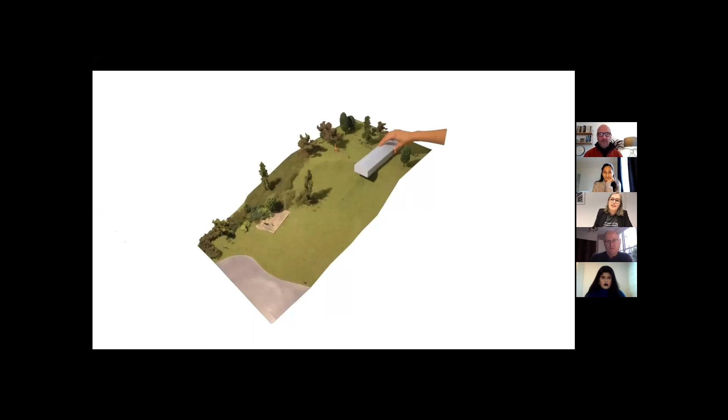An interesting project because it was done by Living Architecture, an initiative by, amongst others, Alain de Botton, to prove to the British that it would not be so bad to live in a contemporary house, by offering these holiday homes made by contemporary architects in a contemporary way. A fascinating experiment—I'm wondering what the follow-up of that has been so far.

You need to inform me about this rather than me telling you about the current situation. In any case, it triggered us because we had quite a large plot on which an old barn, a derelict farm, was demolished, so we could still play with that type—the pitched roof, something that returns in our projects more often. I think it's sort of the house feeling, the idea that there might be an attic.

But also this idea of how close can we push the house to the view, and how far away can we get it from the main street. And this sketchy idea of maybe we can push it across the boundary and make it exposed and unexposed in an unexpected way, which immediately leads to quite an intriguing question about structure.

The whole arrangement of the structure is something very important for the house, and since I'm talking to a lot of architectural students, I imagine this is of vital importance as well. What I think is very interesting about this structure is that it encompasses the shape completely. The volume, the idea, and the structure are really one in this particular project.

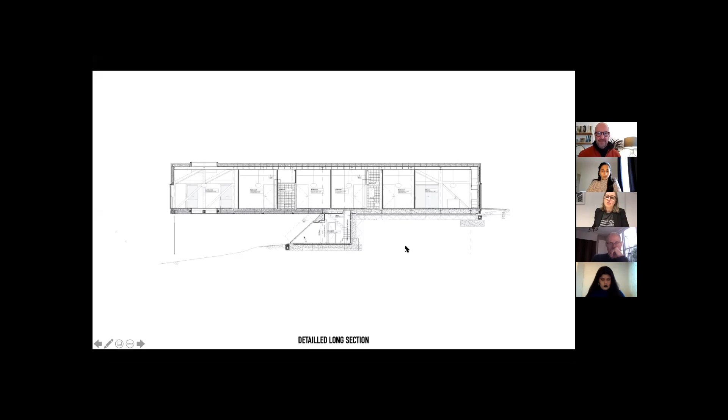In this case, a space underneath the house, a space inside in which you will feel the tension of this house, which is always slightly moving, even if you want to stand at the end near the living room here. It's also shown through a glass floor. And then there's this swing where you can actually hang under this house. So here I'm revealing to you the structural idea.

And then it's covered in wood as well on the outside and the inside. There's a shiny cladding that reoccurs in more of our projects, also as this idea of how, in a way, the building can also reflect and try to dissolve itself. Although it has a big size, it also tries to disappear again.

So it's a highly conceptual project, and it was also supposed to be like a visiting card of what contemporary architects can do, of our ideas. That was definitely also a challenge, and that's how it has been made.

Oh yeah, here you see - until today, this is under construction. The outside is finished, the interior is being constructed right now in Rotterdam.

A depot building, also cladded, in this case in coated glass, in a space in nature where you would maybe even prefer that nothing is built, in a former park. And also this building, that had to be quite big as well, tries to at the same time disappear and create space at the roof. In this case, a new little park on the roof has been established in a building that's predominantly closed because it's a depot.

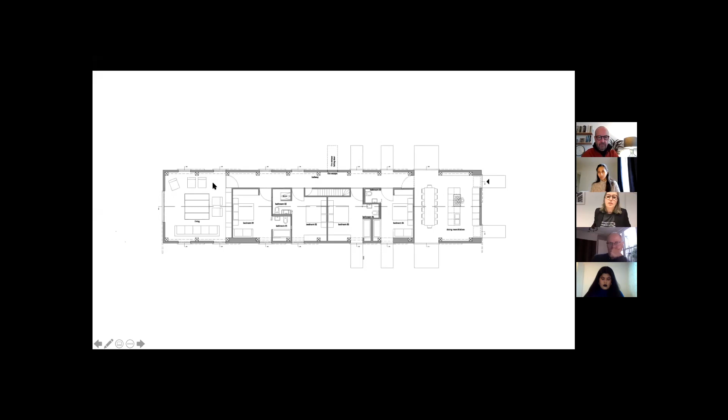The interiors have been made by Studio Makkink & Bey, with all kinds of nice panels based on Dutch landscape paintings. Lots of Dutch design furniture was also included. The wood also gives a certain intimacy again to the whole situation. There's furniture from Makkink & Bey as well, and this extends into the living room.

You see the glass floor - you can make a choice whether you want to be looking at it or cover it, because there's these puzzle tiles. If you think it's too scary, you can detach yourself from it as well. Inevitably a fireplace, of course.

And then there's also this idea that you beam into the nature with this, and it's all surrounding you through roof lights and all these windows, but also at the bottom of the house.

So privacy maybe is an important topic to talk about as well, and in private houses this is even more interesting to deal with. It's interesting in apartments, but also in villas, because you usually go to quite extremes. On one hand there's the interaction between family members, but then the other thing is the relationship with the street and the exterior. Here in a villa project not far from Rotterdam.

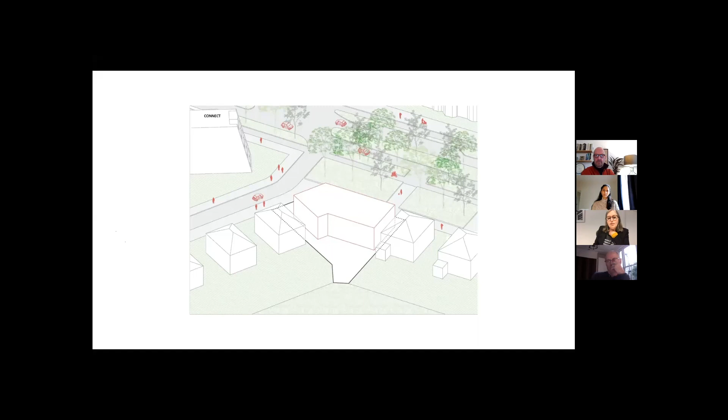And what we did with them was that we sort of carved out a new outdoor space inside, where an olive tree was put because of the Greek roots of one of the family members.

And then you suddenly had this sort of introvert space possible, where actually the whole house could be opened up without losing too much privacy. On the other side, it deliberately closes off itself, and it has this mosaic window where outdoor and indoor are filtered, and you sort of slip in through this front door porch here.

Part of the houses in the area are actually in a white modernist style. That was another thing that was allowed in this neighborhood, because there are some 20s modernist houses built here as well. So, you could say, an obliged choice of style even for us. The bricks are glazed and white.

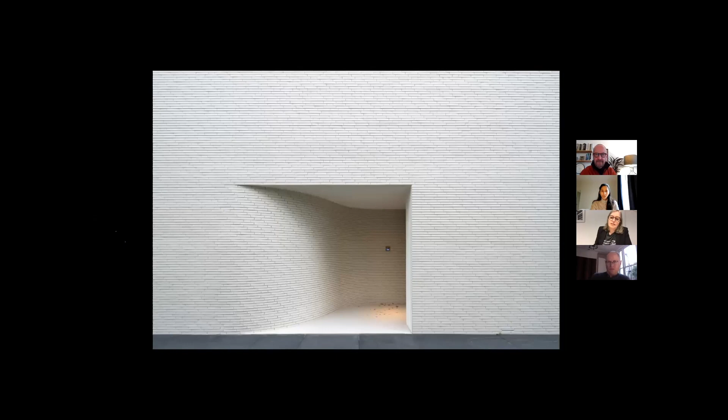Again, the Greek past, the Greek history and the Dutch somehow intermingled here. Modernism and the White House. So here you see it from some other places.

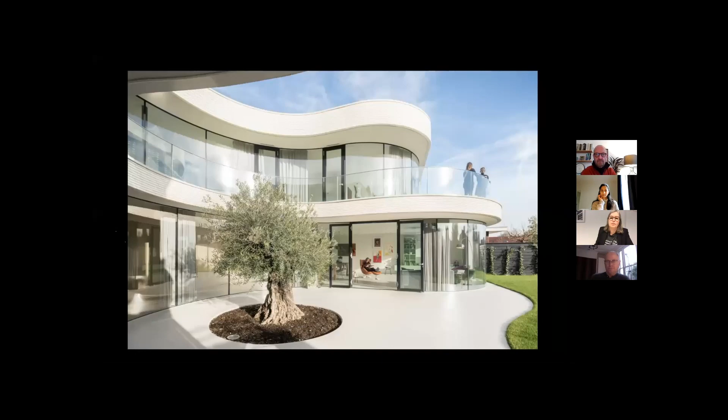It's also this sort of free-flowing floor plan, where rooms are connected to each other and organized actually through this outdoor space. The indoor is organized as well. On the top floor, the bedrooms and bathrooms of the family. And here again, floor to ceiling doors and windows, so that on one part the house can be completely opened, and every room has this relationship with outside.

So you could say that's a deluxe version of this idea. Not so long ago, some friends of us also asked us to help them, and they bought a plot with an old office building.

In this case, we deliberately closed off parts of that other house, where we're confronted with 3 sides of the building already being completely closed. So this is the original floor plan. Only the front side towards a little street had openings. The 3 other sides are blind walls, and there's some roof lights.

It was a derelict building from the 80s with some additions, in bad state. But the owners thought it would be good to try to reuse this. And for us, this is also a good challenge: not just to throw away everything and demolish it, but to try to actively reuse as much as possible of the existing building.

We're entering new times, of course, when it's really very vital that we start to think in this particular way. So, some parts of the structure. It was also quite complicated, because what kind of possibilities do you have if you have such a deep building with such a little amount of windows, living really inside the neighborhoods as well.

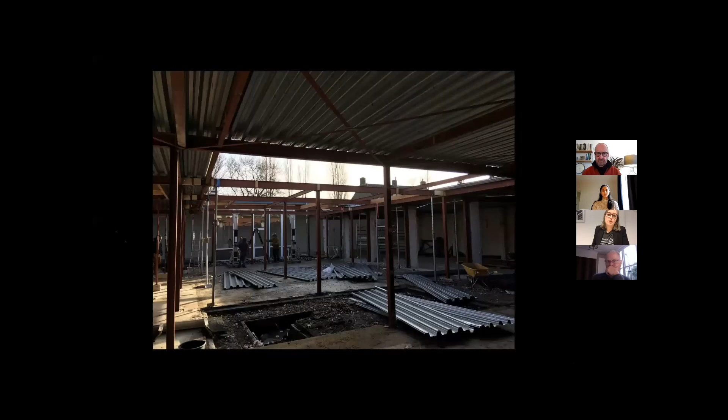So here you see what we did: there were some tiny openings as well inside. We completely opened that up and turned it into one big new patio, and aligned all the rooms around this new patio. There's also a practice in the house of one of the family members who works from home, so that was also incorporated in the floor plan.

So we used the original heights. We used a large part of the original steel structure. It was reinforced, the roof was renewed, and openings were largely kept. This is the new floor plan that we made, where you actually enter and can see straight through this patio right away.

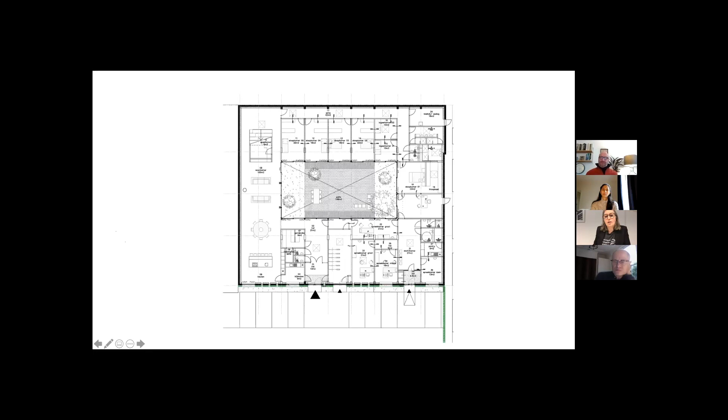And then the higher part, the original higher part, we created the living room. And then there's a sort of sequence of rooms. You can actually make a round, walk through the house if you cross through the practice space. And well, it's wonderful to see how you get this amazing relationship with the patio.

I think that's something which will come back as well. It's not enough used, I think, but under denser circumstances, probably one of the best ways to create indoor-outdoor feelings. Again, our trademark: big windows and openings, and in this case, with a lot of wood being used.

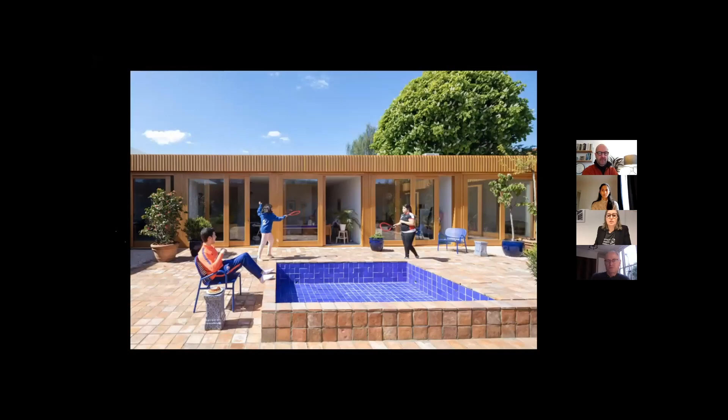And so the original walls and window openings are all covered again, and mostly use of color creates an atmosphere in the house. Again, with Mediterranean backgrounds, colors were picked together well, under the guidance even of the inhabitants, what they preferred very much. So you see this now.

Last summer, very nice space to be in, also in the quarantine situation, of course. And part of the old floors are still in that patio, so we kept a couple of areas where you can really put full-grown trees, and others are more covered and used in different ways.

So here you see that, and a lot of the materials here are actually recycled materials that have been used also in this patio.

When I think of Britain, I also think of the suburban house and the row house. I think that's something we have very much in common between the Netherlands and Britain. But it's also something I sometimes get a bit sad about, seeing that there's maybe not enough development in this way—it's still largely connected to cars.

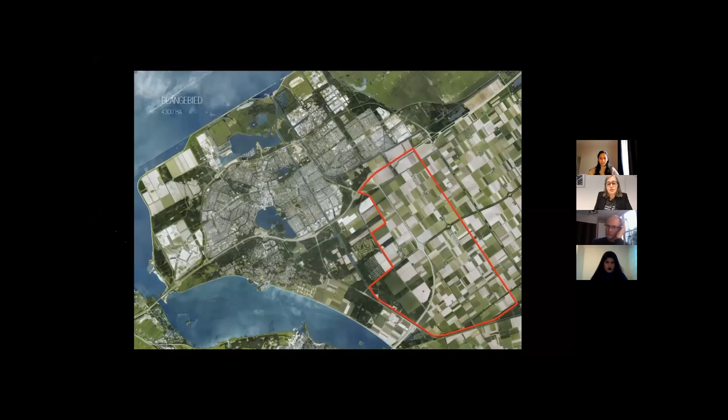And to its extreme, I would say—I have to speed up a bit as well, sorry. The other end of the spectrum was at some point this division: house, car, garden. There's a lot of abandoned agricultural land in the Netherlands because of intensification and other ways of organizing area. Near a new town, not far from Amsterdam, the idea came up to create even more freedom for the individual homeowner.

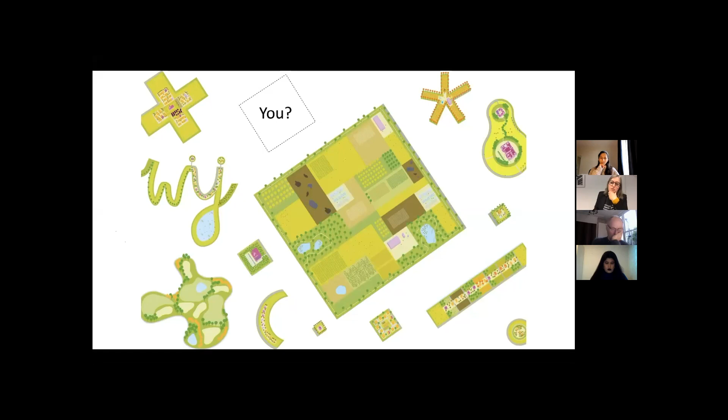Instead of planning everything precisely with all the statistics applied to the previous schemes I showed you, the idea was to give maximum freedom—a plan called Freeland, with the idea that you could achieve more freedom if you work as a collective, making decisions together on land use, but not necessarily exactly as planned by a government organization or a housing association.

By also thinking about sharing facilities with each other, but more on an individual basis. The calculations showed that together you could create more freedom, but also more space while using it more effectively.

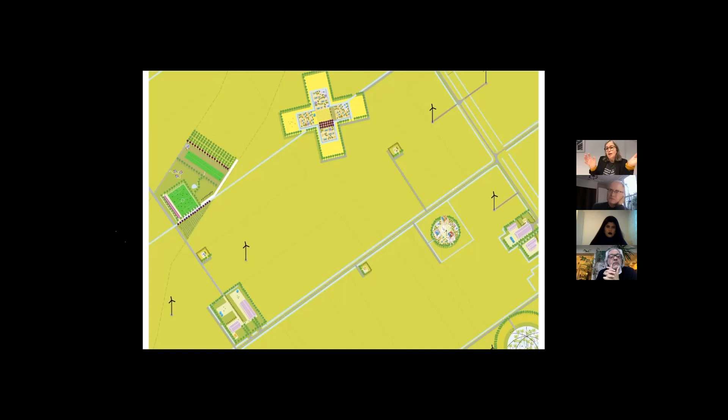The givens in this area are that some main roads are made, but individual roads you can build yourself or share them, or build them all by yourself. The money you have, you can distribute as you like—spend it all on the road, or build bigger houses, or want bigger plots.

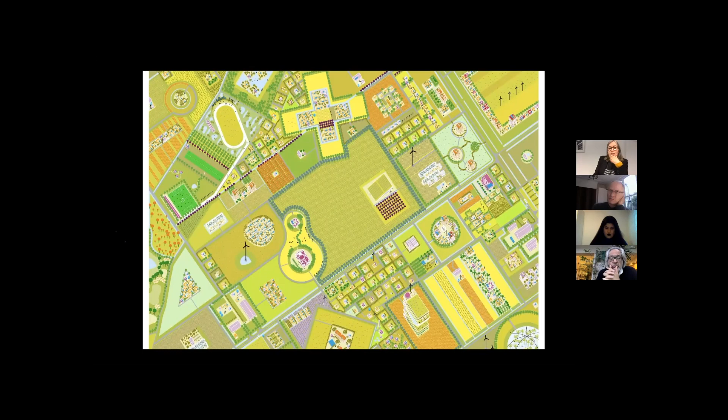You were not obliged to use all the infrastructure that is normally automatically put in place. You can do it together with friends or with like-minded individuals, and there is no forced grid on you beforehand. Individuals and collectives took up this challenge—some people developed prototypes and tried to find users for it. If you go there now, you can see all the different houses and experiments people have made.

Maybe under other circumstances in other countries it's not so revolutionary at all, but for the Dutch, it was, I can assure you. People experimented with building bigger houses with light constructions, and of course experiments with all kinds of contemporary materials and recycling were made.

People started to realize their dreams around their plots, intervening with the transport systems and how traffic is organized. Some used the opportunity to create their own grey water cleaning zones—this is a long house where several families live together, and this is where they clean their water. So they were off the grid partially, etc. All these dreams could be realized in this neighborhood. Long talks about politics and ground price are also possible, but that's maybe for another lecture.

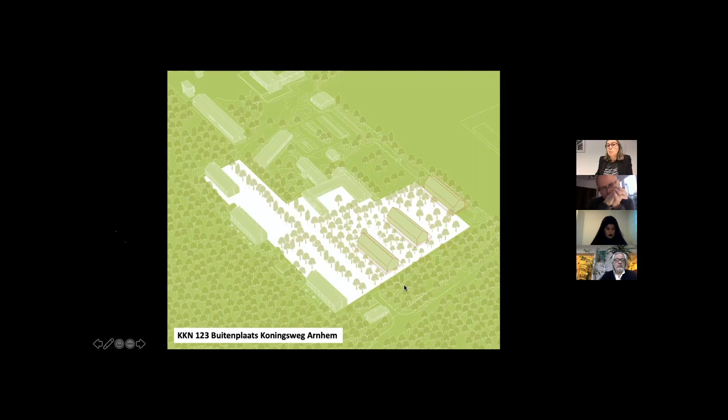Including this one—I'm talking about three rows up front. It's a tiny project; again we would normally maybe not have been asked for it, but we thought, if it's a tiny project, we might actually be able to experiment again, because we haven't been able to experiment with row houses in a long time.

Like I said, the shape was given. They were to be grayish, which was part of our own master plan and remembering of the army past. We thought, let's try, because there are so few experiments yet, to see if we can make it very circular, reuse a lot of material, make it demountable, etc.—all kinds of aspects of circular building. Let's try to experiment here, and probably people could be interested in living in such a house as well. So we went onto the market.

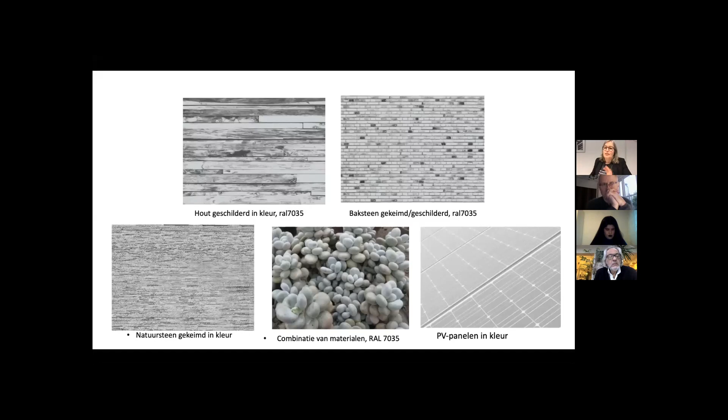That was the previous image, to see what kind of materials are available—depending, of course, on second-hand material markets. We thought if we give them all a tone, a color, then we can also create this unity that is also needed. Well, it's still under development.

I'm not completely happy yet with this image, of course. But the end of the story was that we would end up with a lot of material, like an assemblage of materials. And I started to think of a wonderful little building, A House for a Driver by Gerrit Rietveld, that is also an assembly of different materials.

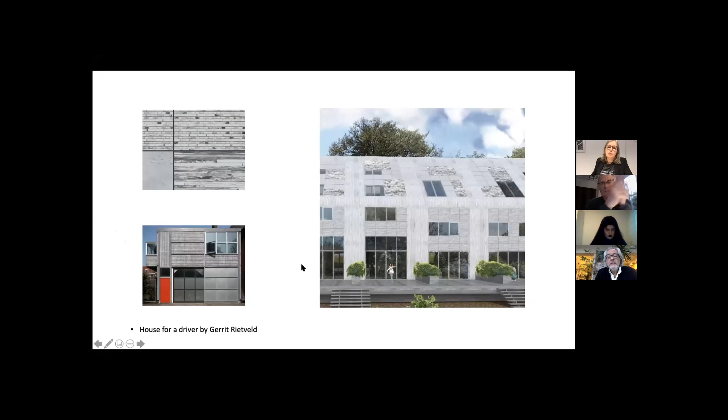Got inspired by that to see if in this wilder way we could collect all this collage of, I don't know yet what kind of materials we will use, and whether people want more or less solar panels or green patches on their roofs. And while we're at it, let's differentiate. Also, the car parks are supposed to be underground because it's actually in the middle of a very beautiful area, so the client asked to put the cars underground, and there you see.

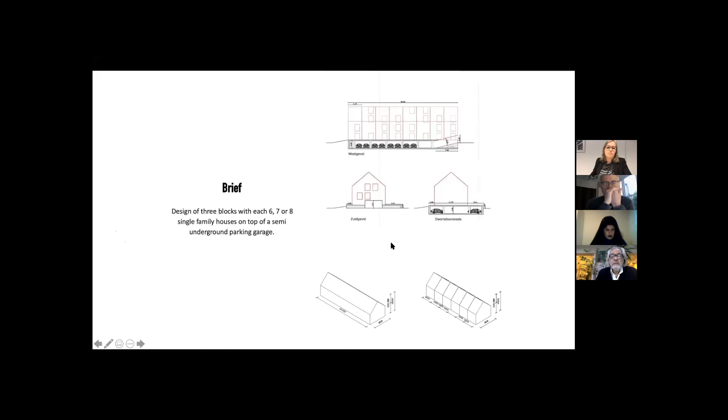But should they all be the same? No. Maybe we can also change the sections, the floor plans, what people can do with their house. Maybe they can choose from different types of houses. So it's kind of this.

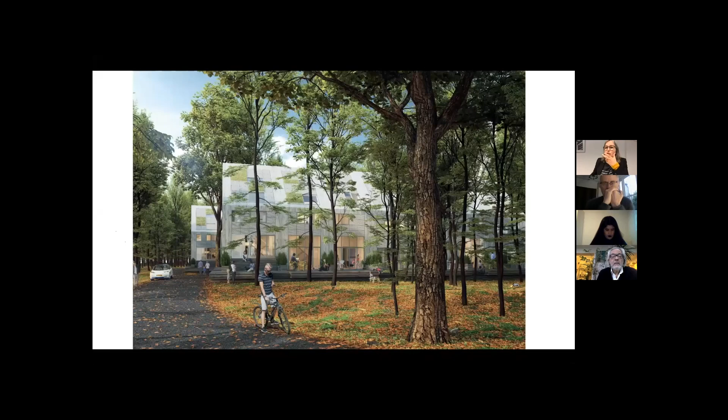We made many different variants of sections that people can buy into that might accommodate their favorite way of living. I won't bother you too much with it. It's still under development, not the final shape yet, maybe also not expressive enough yet. But I'll keep you posted.

The biggest experiment is even to make it work so far, because it falls outside of all kinds of guarantees that normally have to be given for these types of houses. Otherwise people don't get mortgages, etc. So it's an adventure for us.

Ongoing. And in the past, of course, we've also been trying to see how we can make a super dense suburban quality, at the time when people still thought it would be good that people in an inner city have two cars. So based on a grid of 18 houses and actually 32 cars, this plan was made in Leiden, where we created a section to densify—how dense can you build such a neighborhood?

I'm thinking nowadays it would be good—here it was in the inner city and the cars had to move inside—but why not try to do this now in our suburbs? Because why are these cars still on the streets in our suburbs? That's why I'm still showing the project up to date, although it's already a bit older.

Again, with individuals doing even their own architecture inside. They build collectively in blocks, but they can also invite their own architects. There's no coordination except among the people themselves who are building together. They have to fill the envelopes and are built back to back, so they have rooftop terraces, patios, and they can do something at the front of their house.

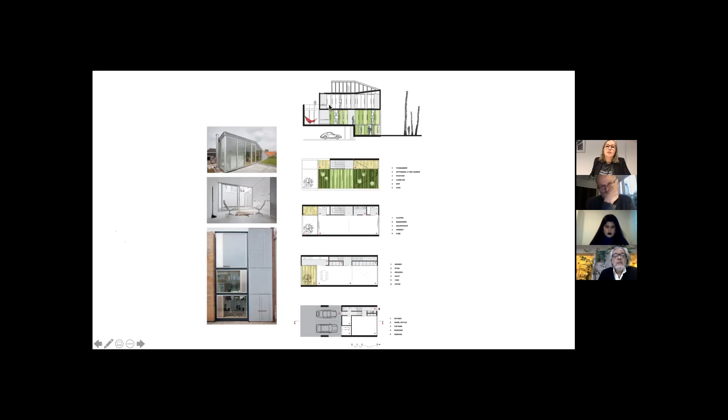Obliging people to always make an open space towards this street, these car-free streets, because the cars are underneath. And here you see also how these roofs and these different balconies develop in this place.

And if you go there now, 15 years later, indeed all these streets have different characters because the inhabitants were also able to choose their own plantings. They had to do that with the other block again. There's children playing everywhere—it's become very green, like a real oasis, and there's a lot of people hanging out on the streets.

We also left out one block that's important as well. This is the missing block, where I found, on a sunny day, kids hanging out in the little park.

I don't know if I can go back to the master plan, but also what was important for us is that we created all kinds of different zones in this area—little playgrounds where small kids can play, the streets without cars, and these are the streets with cars. This is a bicycle highway.

Larger areas around the water where taller kids could play. This is the missing block with the park, the mini park I just showed you. So this whole differentiation of spaces is important—the street, different playgrounds, all kinds of organization inside.

Bicycles can also be parked under the houses. Still relevant, I think, until today.

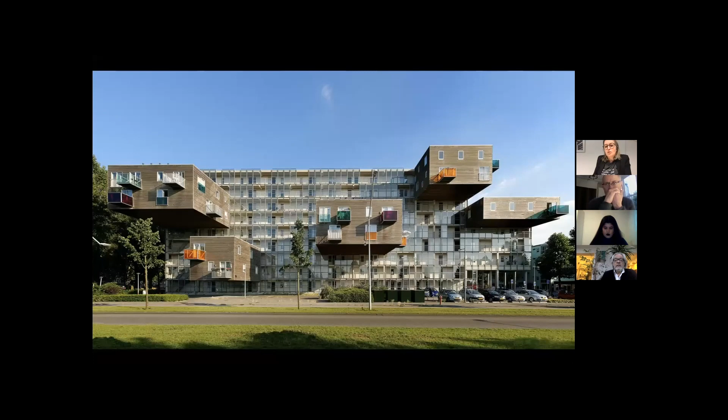And a third typology, I will show you four—the apartment building, of course. One of the original first buildings of our office was the block that fit all the houses for elderly, spectacular on this side, where some of the houses are actually extended.

The sound regulations for sound between apartments are so heavy that we discovered the structure could actually carry the cantilevering houses.

We didn't have to add much more than these steel columns here, and the rest is all pulled backwards to floors and walls. This is a well-known part of this house, but maybe lesser known is that we also deliberately created these balconies in a messy way, so that people somehow started to interact with each other. That was our idea.

And we also had the colors. There's a lot of same houses, but every house has its own little balcony with its own material, in a different connection with neighborhoods, to create this little element of your own identity in the sea of houses, which was very important for us.

We even went through the complication of photographing every house empty and entering again when people were living in the houses, to see what had happened. I'm sorry about the extremely low resolution, but it's published here and there, to see what happens if you do these things with a house, the different window openings and the different colors.

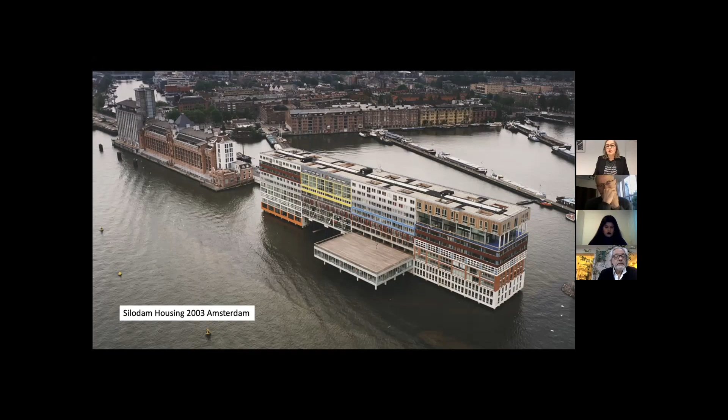For example, collections of different typologies, creating suddenly a platform shift going out of the building. How far can we go in structure to make lots of different types of apartments, as you can see here, without losing too much money, so that not only vertically but also horizontally all kinds of differences could be made.

The relationship with inside and outside, and how it can differ if you make galleries, balconies, patios, double height spaces, voids - different types of structures inside a building.

This is actually also a constant way of trying to make things happier, to have streets inside buildings, to create diversity, and through diversity, a more diverse community inside buildings as well.

People who like to live close to the water, people who want to live up, people who live on one side but can go to this big balcony and see the other side as well, where joint events take place, as well as on the other balcony.

And expressing that also through facades, through materials, through references even to other architects and styles and days.

And then in the end, of course, you see the sort of densification of the Netherlands also coming back in our work, where we even start to create hybrids like the Market Hall, where the apartments themselves start to form a space that would otherwise maybe not have been made.

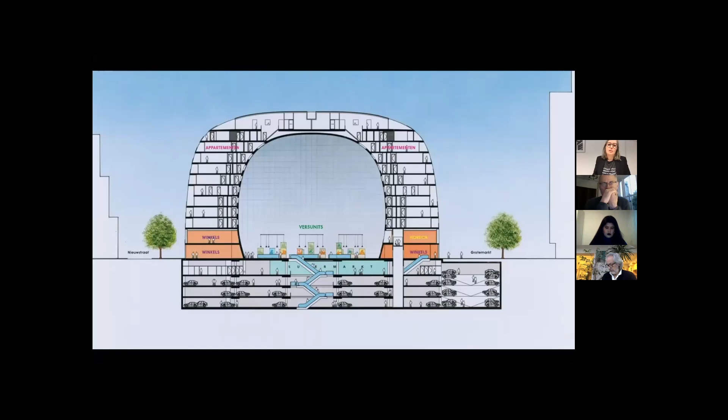And a sort of technical challenge how to get to these apartments, to see if they can get connections to the outside, but also to the inside of the market - sort of mid-range apartments, couldn't get too expensive.

The top ones are more expensive than the lower ones, but still halfway decent. You see the kind of regularity used to create this shape.

I'm talking about it now from this perspective, but you see also here how in the inner city of Rotterdam things started to mix and mingle under the higher pressure, which is also nice because they're just building towers. But suddenly there's this other type of building with its unique identity as well for the people living there.

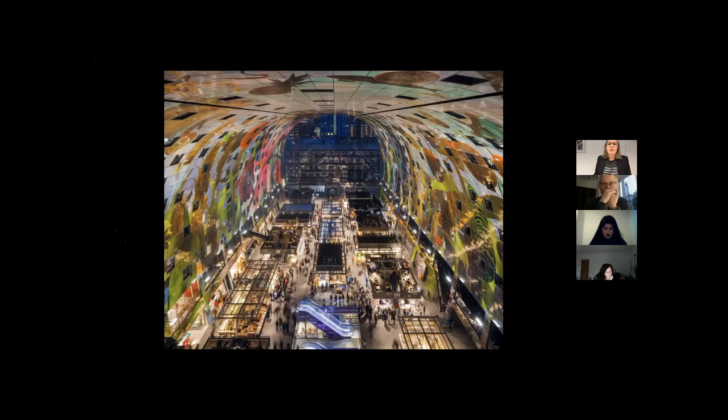This is actually going down into the lower parts of the building, and the archaeological findings exposed along the supermarket and the parking garage, and then high up, the windows of people who can look into the market hall.

Again, a variation of patios, balconies, all kinds of interactions between inside and outside here possible, which then becomes more complicated if we start to work with towers, and the constraints become stricter and stricter.

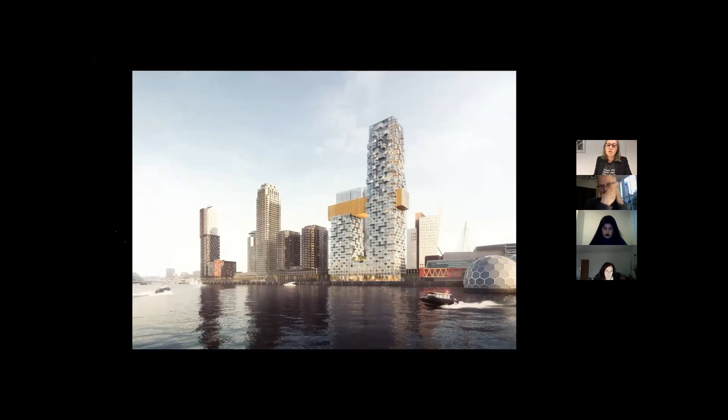In this case, in this competition design for a tall building, which houses apartments, a hotel, all kinds of offices, restaurants, facilities - the Golden Bridge is a hotel, actually.

In a way, what happened in the Silodam, you can see how the shape of this building creates terraces and roof terraces as well, that can be used in different ways, but also the outdoor space itself becomes a theme.

It becomes a bay window, a terrace. You can see maybe other people. It can have different expressions, which makes your inside also different in this building.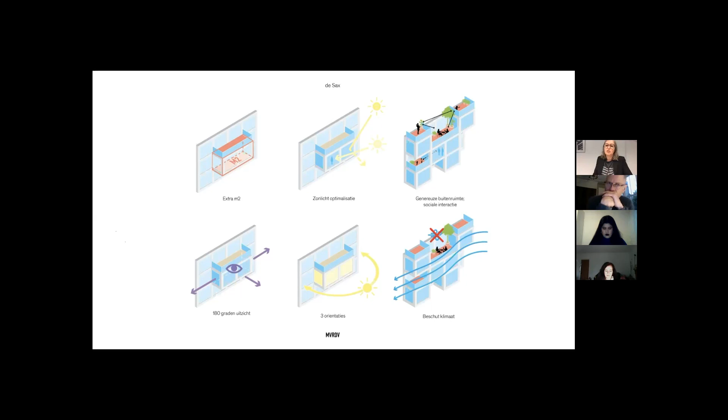So not a monotonous repetition, but diversity and choices that can be made, and it also can impact floor plans, offer much more choices and varieties to inhabitants, and attract different kinds of people.

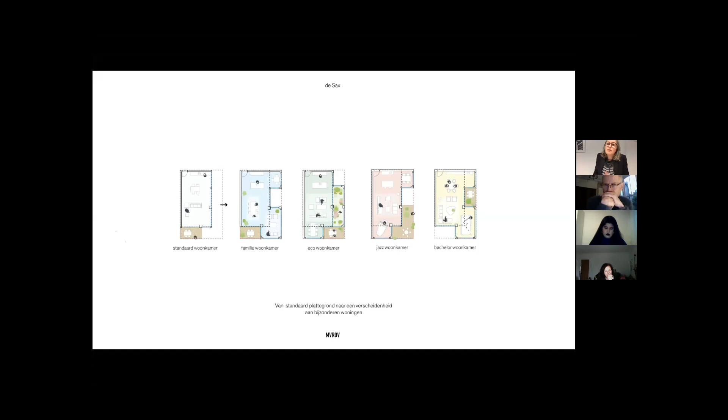Therefore, what we know works so well in the Silodam, that it has a truly very diverse population inside as well, and even at some points these towers meet, and you have collective roof terraces as well.

And there's bicycle parkings hidden in the core of the building. Like I said, there's interaction with stuff on below.

Entrances can be much more bright and should activate, of course, also this area in Rotterdam at the waterfront where lots of high rises are built. So how can you make buildings that are not just fun to be in upstairs, but also are outward oriented at the lower levels where people are on the streets?

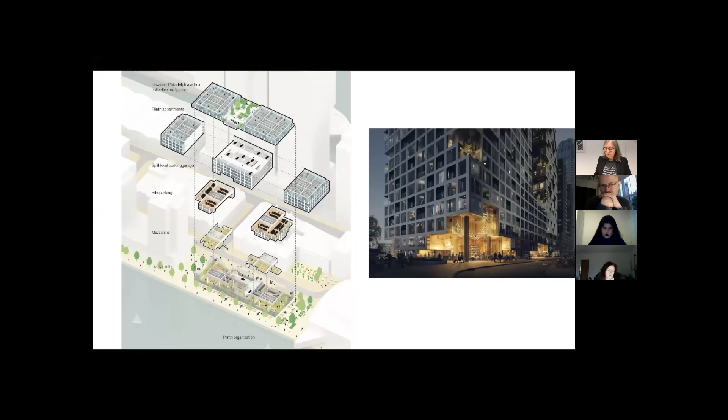Towers—more and more we are building towers. Sometimes because of certain constraints, it's interesting to see that with this outside zone, you can vary the apartment itself and the identity of that space, with extra layers, roofs and platforms that you can create, adding extra attraction for the people living there.

Moving on—this is a Masterplan project where we are transforming old offices. Some are demolished, some are reused; sometimes we use parts of the building, sometimes just the car parks. This is in Amsterdam, inside the ring, on the edge of an allotment garden area and an older neighborhood.

We were able to use this interesting footprint and transform it to create diversity, because what we're getting to now is something more complicated. Where in the Silodam project we could still make a huge array of different types, sizes and financial categories, we're now narrowing down. The programs are getting trimmed down—mostly a certain type of 1-2-3 bedroom apartment, mostly 2, not more, somewhere between 50 and 90 square meters, but also not more. So less and less variety.

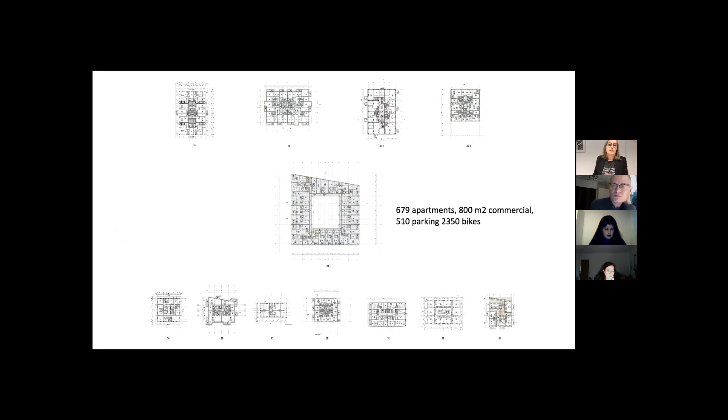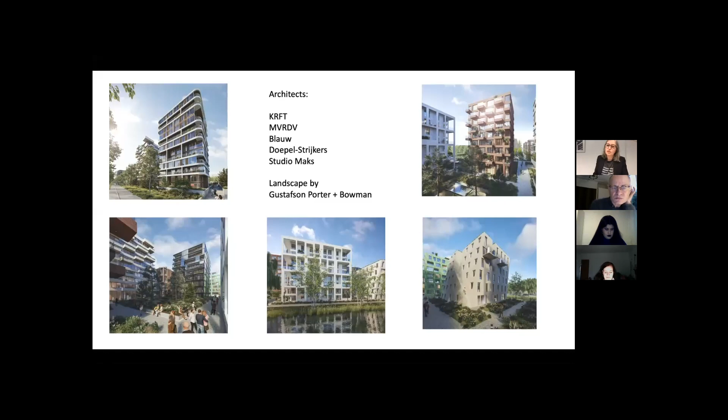On scale, the different plans—same scale, but all the different buildings we are making here—and you can sort of guess the different floor plans connected to it. You also see how they have different interactions with each other. Sometimes they form a mini campus, others are like blocks, with car parks underneath.

You also see the differentiation in balconies and outdoor spaces. I think it's super important that we have this opportunity, when we live in an apartment, to go outside.

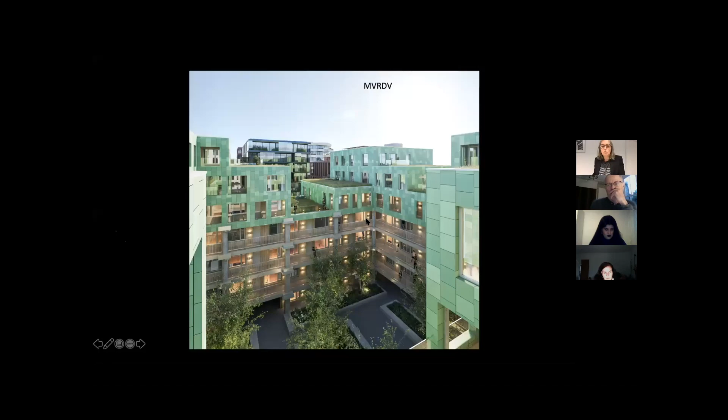This is an attempt where we put a wooden structure on top of an old office building, and hollowed it out. This is under construction currently—these are renders, but these buildings are under construction. Here you see again this idea, also in the Sax project, of an extrusion of the facade and different relationships between inside and outside.

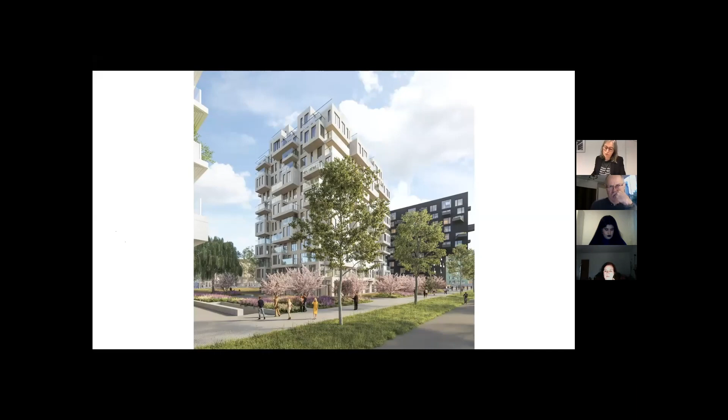I think the next level for us would be to create high-rises that are much more neutral in their use, where it can be altered and changed whether it's an office or a house. It's been done, but it means different floor-to-ceiling heights, and thinking differently about the technical aspects of buildings. That's one of my next ambitions, to see how we could do that.

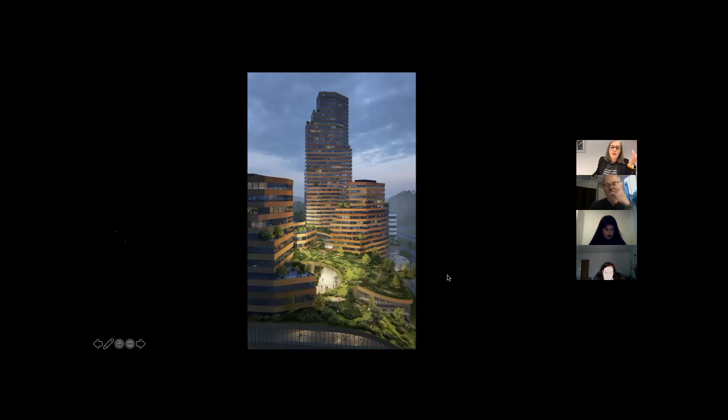That starts to translate into what a building looks like—does it look like an apartment, or like an office, or is the difference diminishing between the two? It's a recent competition we did, for a complex with offices and housing in the same complex.

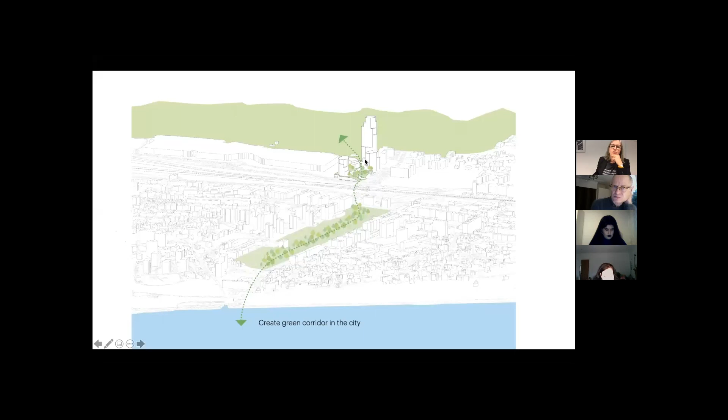In Poland, we tried wooden structures and wooden facades as much as possible. We landscaped the plinth of the whole complex and introduced several balconies. Just one honorable mention—unfortunately from the sea in Gdynia, on the northern coast of Poland—going from a suburban area with a big shopping mall to a more natural area, straight through our plot.

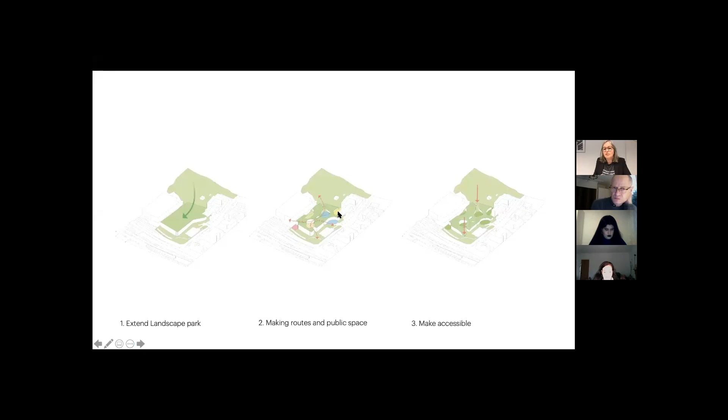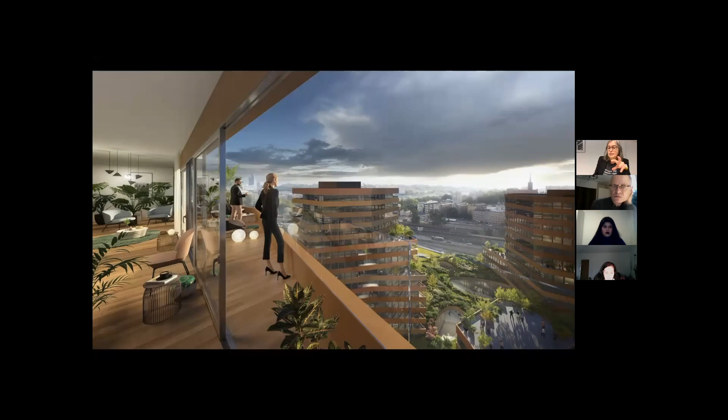So there you're suddenly making a mini environment, which brings me to the last group of projects, where offices and apartments start to share spaces, potentially also facilities, I would argue. And here you see, of course, we have a magnificent view at the top. But also this idea - are we still making very particular floor plans or buildings, or can we create a more flexible future where things can change function more easily?

In any case, I think with the rise of ever denser inner cities, more high rises, there should be a growing production again of community buildings, for example. They do that wonderfully in Denmark - we learned through this building we made, where there are all kinds of spaces you can use differently in the daytime, in the evening, where you can hang out, where you can learn to cook, where children can play when it's cold outside or dark, with some spaces surrounding it where you can meet. That should be part of the mixture as well.

So that's also what I mean with indoor-outdoor. We have all seen, until COVID, the more and more intense uses of libraries, for example, for kids to do their homework, to find better internet connections, which they will be dearly missing now, of course. But libraries as new hangouts.

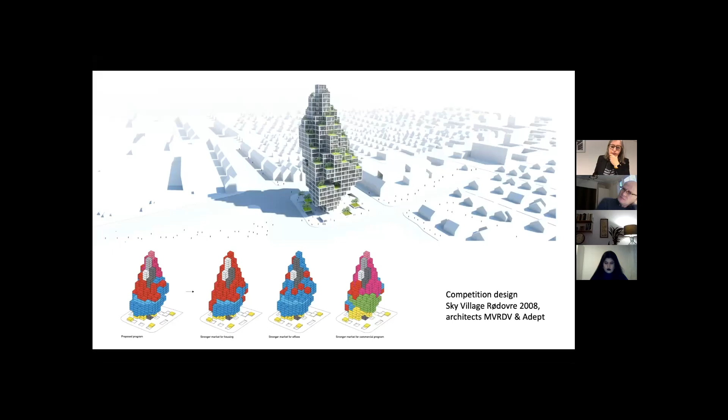But I think in an ensemble like this one, again, it's a bit playing with this hypothetical idea of - does it really matter what happens where? Shouldn't we build more buildings that have a certain neutrality, where functions can more easily be exchanged and used? Sort of a vertical city idea. And then it's also interesting to add even more sustainable layers to that idea as well.

So this is basically a high-rise project under construction, actually already at its highest point, in Amsterdam, where cities started to realize that in the business district, the financial district, it was getting really gloomy. Nobody was living there. Changing that now - they're building many apartment buildings there as well. You can see the ring road of Amsterdam, the south edge here. More and more apartment buildings are added to the mix here to turn it into a real piece of city. And one of the projects is by us.

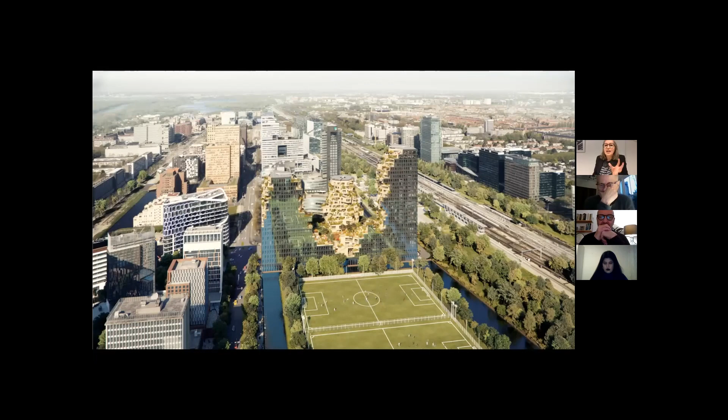And this building - I don't know if I can go back - here you see it in a render next to some incredible soccer fields still present at the time. This building has an exterior that sort of mimics the office area, and then the interior is carved out, because it's also on a link between this business district, now turning into a real district, and the inner city. And maybe it can also connect in another way - not just being built, but also being green, for example.

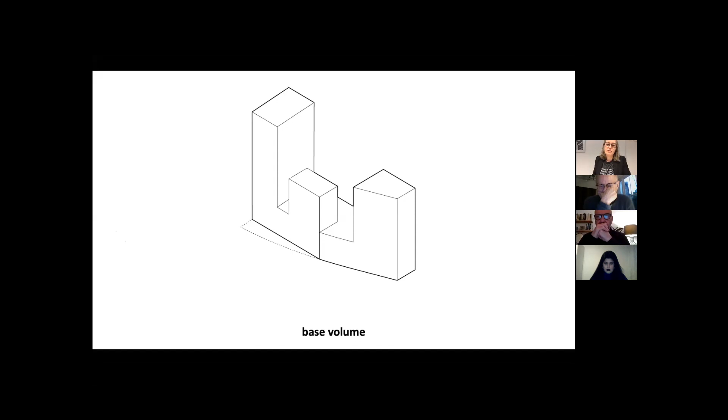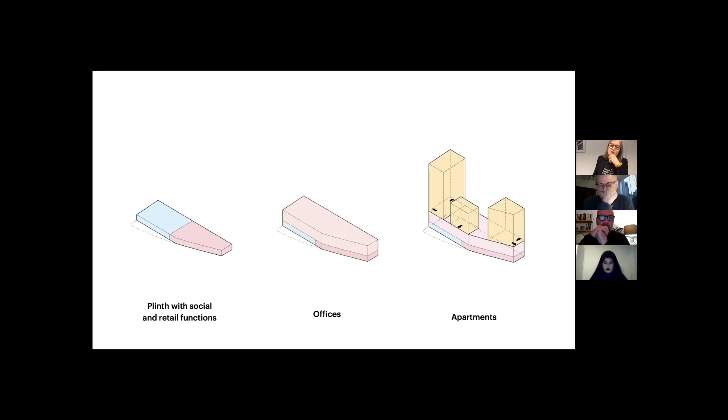This is the original urban layout that has been given to us, within which envelope we had to work. Different functions were given that had to be layered at the bottom in this plinth. And then you see how that has been developed by Winy and his team in this case into something which follows the guidelines.

There, the building's also smooth and shiny, but then things start to develop in a completely different way, almost like a landscape. So these are like little hills being built there, and these are turning into balconies as well - balconies that can be shared and balconies that can be individual. Yellow is the housing, and the light blue is restaurants and bars, and all kinds of other functions can start to mix and mingle here.

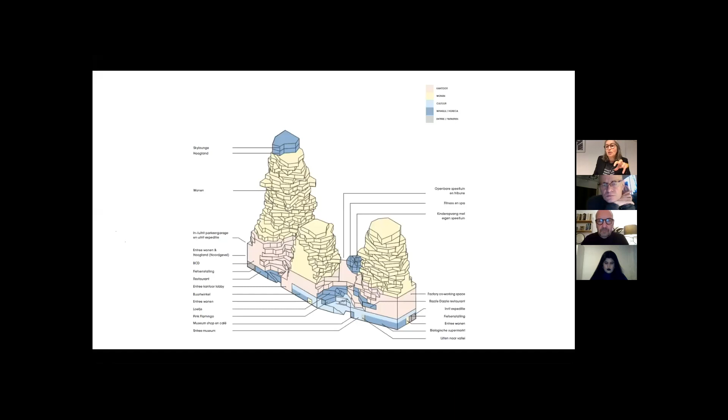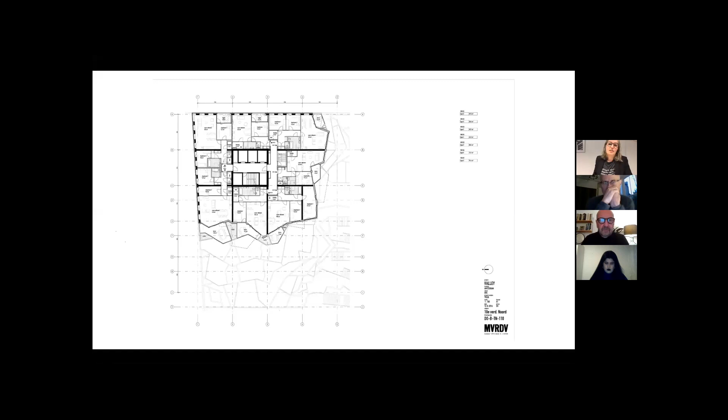So it doesn't necessarily always have to be this sort of straitjacket where functions are mixed and mingled. It can also take completely different shapes, with this possibility of individuality, views, and balconies developing from this floor plan. As you can see, it's also parametrically designed so they don't block each other's sunlight on their terraces. That's something I couldn't show you today.

There's this sort of multiple platforms that emerge on the ground floor, but also inside there's this shopping area, hollowed out with daylight from the top. You actually expand the site and the tough context with lots of streets and cars into something which has a different atmosphere inside the building.

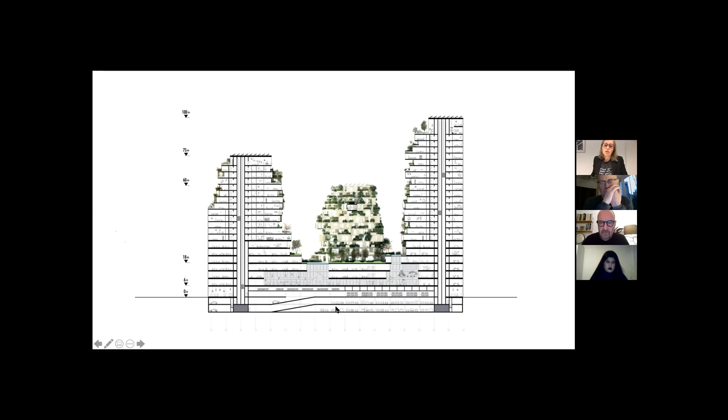You can see here also in light gray this cutout section where shops are, car parks underneath, but also other platforms for partly shared facilities, but also more private gardens as you go up, covered with some solar as well.

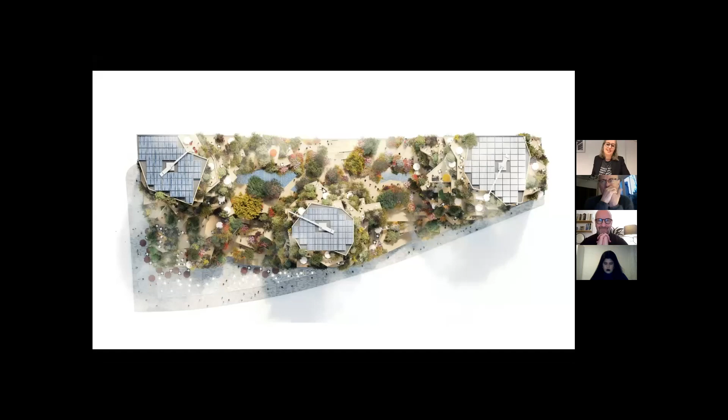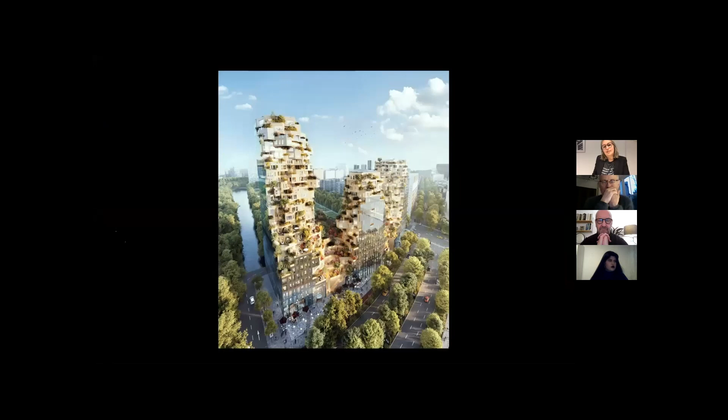And this is an interesting view from the top, the bird's eye view - rightfully so, I think, a good word to use for birds especially. And this sort of hybridity in the street and in the connections here. Very nice. Like I said, actually I reached the top already - sorry, I haven't got a latest picture for you.

Because in this ensemble, this interaction, interesting things and atmospheres can happen. This densification is, of course, our new task to handle somehow. And what can we do with it? We can maximize and optimize it, and you get this sort of crystalline shapes here in the inner city of Eindhoven, a city largely rebuilt after the war because it was severely damaged.

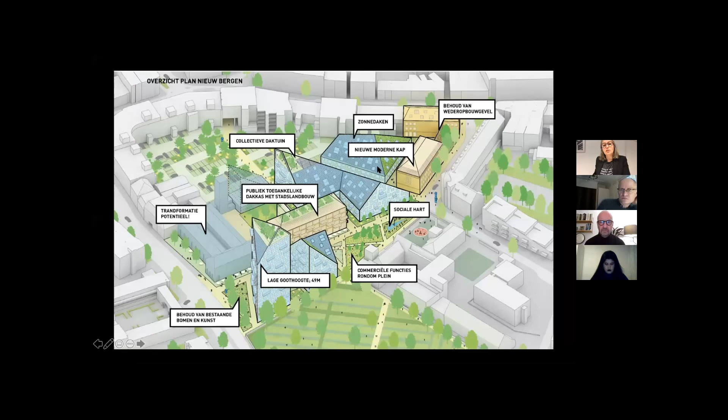Still some existing buildings also from the 50s and 60s that they want to remain - the yellowish parts, new ones, the blue parts. Daylight is very important between the buildings and the streets. That's why these carvings are made, to get enough daylight and sunlight in the complex.

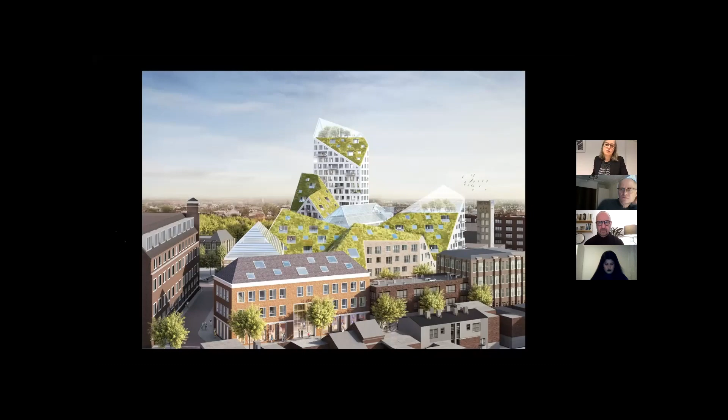And these roofs, the pitch roof, also usable for all kinds of other things like solar panels and greenery, creating different types of houses, renewing the existing parts in the same fashion with more roofs on them. Like I said, creating differences in typology, also in the apartments, different spaces in between, little squares, streets.

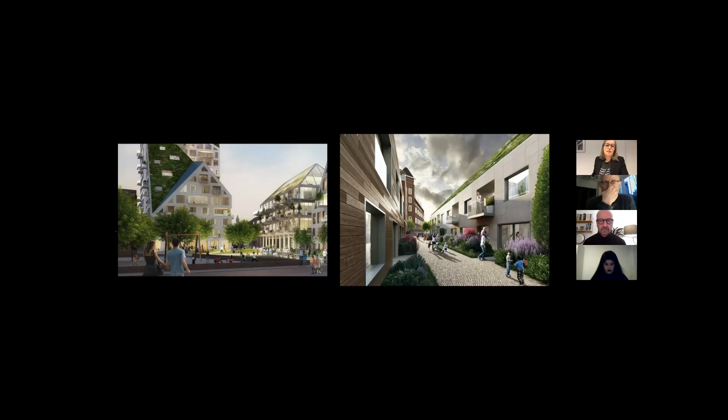A lively neighborhood. Cars are hidden underneath, as you can see here. And in these crystalline shapes, also these roofs and spaces start to emerge that can be used potentially collectively in the project. This one is going under construction, I think, pretty soon.

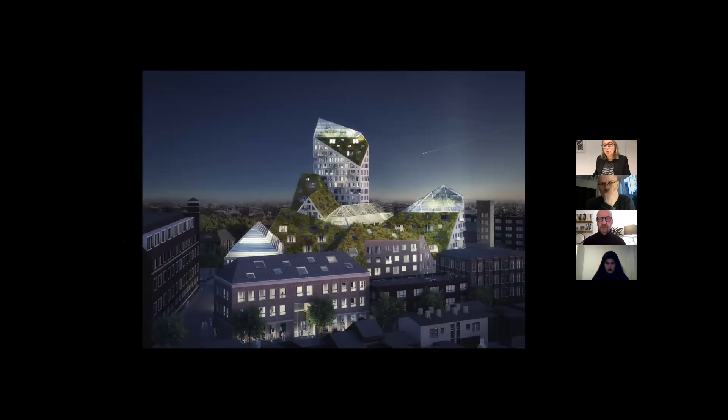Winter gardens can be made, because living under dense conditions it's also important that you don't just have a street and inside and garden or balcony, but that there's other spaces where groups and clusters of people can meet - people that live in the neighborhood, for example, or live in that particular building. That kind of diversity we need in our surroundings and in our society. Multiple escapes, potentially as green as possible also.

One but last project. So what can you do, for example, in North America in particular, where this thing with the small apartments gets even into a worse case scenario, because they also start to make very deep and narrow apartments where you have a sort of den in the back where your bed is. So confronted - that's something I think we have to avoid when working there.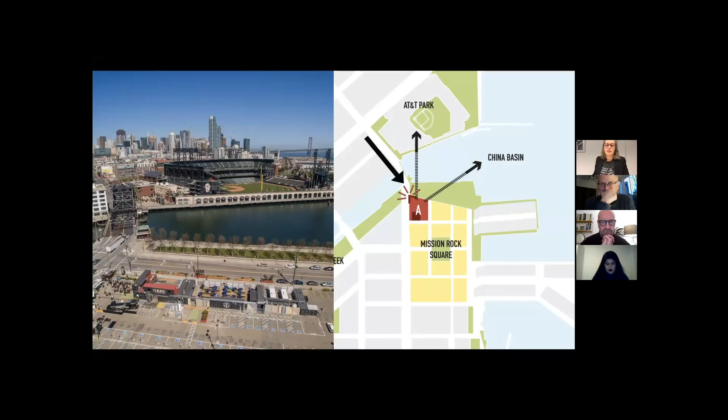However, this project is quite particular. You see here on the left a ballpark of the San Francisco Giants. They own the big car park on the other side of the harbor, and decided to turn it into a neighborhood and put the car parks in buildings. Well, that's something spectacular, of course. They're still partly our clients.

Four architects were asked to make the first four blocks, and amongst us, under the guidance of Studio Gang, we made agreements that this is going to be very busy when there's a ballpark, when there's a game going on. There will be people in the streets, there will be restaurants - it's very busy. So it might be good that in our blocks, which is partly offices, partly retail, and lots of houses, we make these collective, semi-collective spaces as well.

Between us - so one of our blocks, for example, had this very deep plinth and very deep tower on top of it that we had to make. So all the yellow is residential. We immediately started to think of, let's not make this very thin den-like studio, but let's try to find some space and some room.

So we started to carve out and also connect that to the other blocks - all of us did that. We made these internal connections amongst us, and even carved out more of our block, creating more balconies and light. Fortunately, we were allowed to do that, to open up the block on all sides and to let the green come in as well.

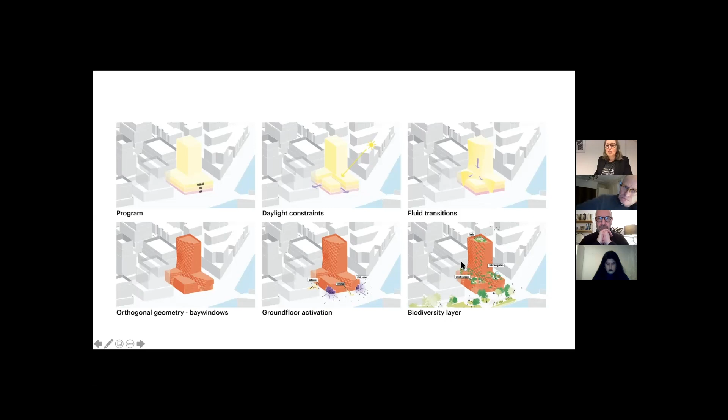So that's something we have, all our inner connections and hallways and the sort of alleyways through the blocks as well. You can walk through all the buildings, also to get more diversification in public space.

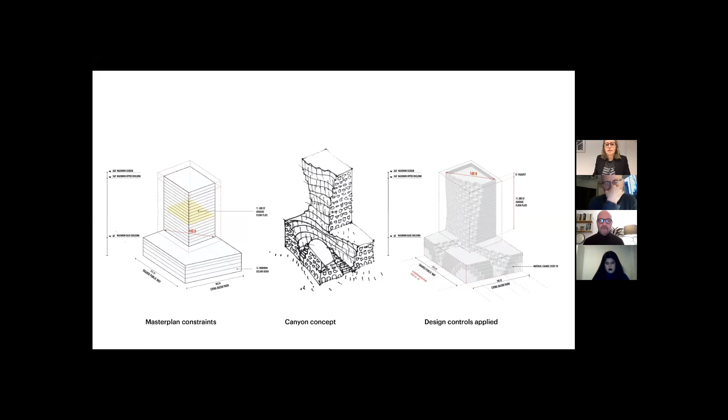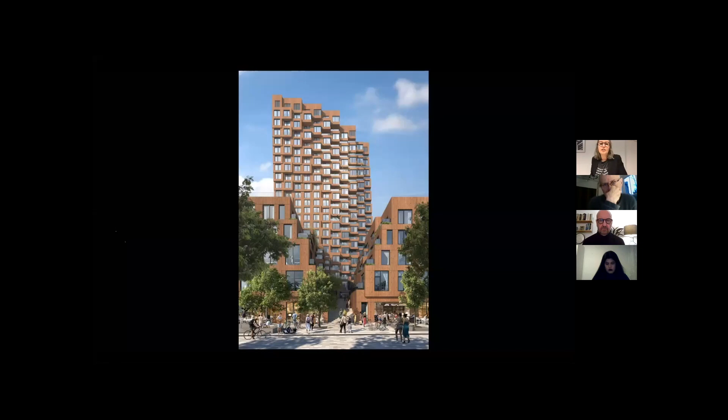Here you see even more about that operation in detail. We try to turn it into this sort of strange rock, carving it out, and finding these openings for our future inhabitants. So we made the street that cuts through the retail and the first three layers of offices, and then goes all the way through our building.

On the rooftops there will be communal spaces, which is something that luckily, even when we built the Silodam, we had to smuggle in collectivity - but nowadays it's on the menu, even in the Netherlands. Creating these accessible rooftops for everybody, very European outdoor spaces as much as possible for everyone in the project. Hopefully they can sit together and, as in Amsterdam, see big boats moving in on the River IJ, and listen to the ballpark atmosphere on the other side.

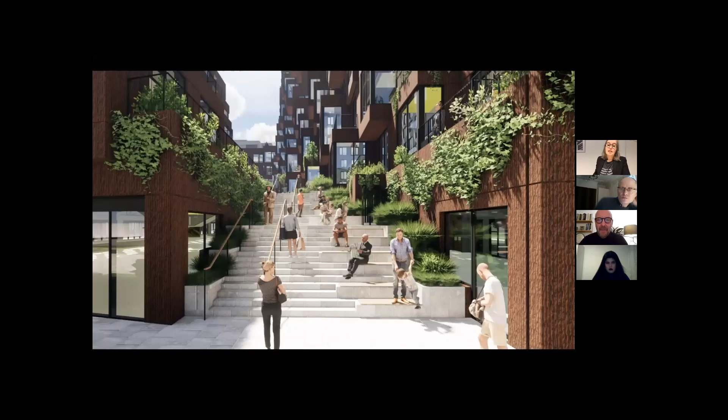Can't show you all the floor plans, unfortunately. I'm not allowed to, but I can give you sneak peeks into stuff like this. Yes, this area will be closed off at night. There's a fence that will close off in the evening - quite open, but still. So this is often the give and take of when you start to create these kinds of spaces.

That's a consequence - it's a privately made public space. Let's be honest about that.

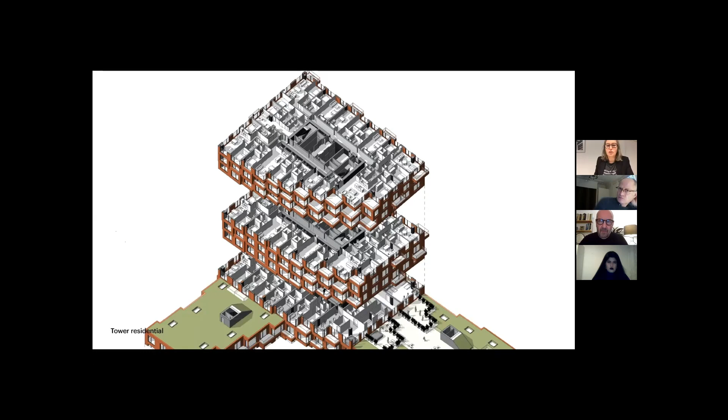But here you still see how, also because of this operation, a lot of people will be able to look through the project and have wonderful views, and all the apartments will have balconies. We avoided the super thin, long apartments here. Materialization: glass fiber reinforced concrete panels that we will clad the building with.

It's actually a large part also affordable housing. So you might think San Francisco, isn't that the place where all the houses are crazily expensive? But that was not the ambition of the client - they really wanted to make it accessible, not just for the happy few. So that also influences the way we're going to build and construct it, and the materials we're going to use.

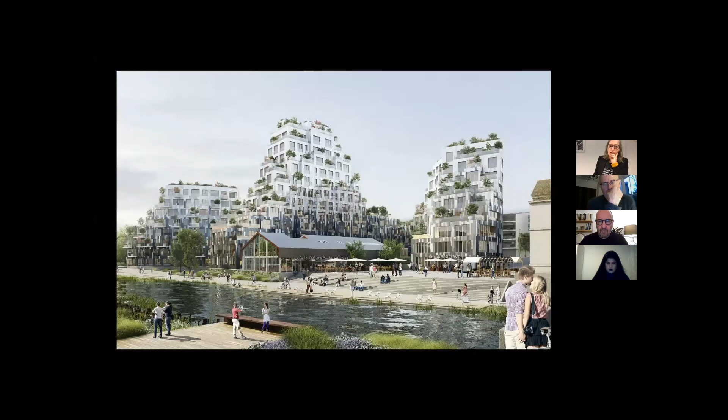Last project - do you still have some time to finish? It's the very last one.

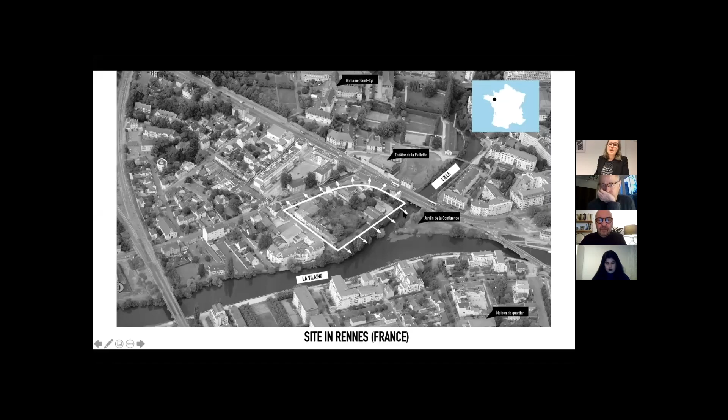Also under construction in France, in Rennes, the capital of Brittany - quite popular among the Brits as well, I believe. It's not far from the beautiful old historic center of Rennes, on the river La Vilaine, an old octroi tax port, and some of the buildings still remain.

Again, a competition, a given envelope that we started to manipulate for views, for example, also for the people living in the back streets. We moved the block away a bit for two old buildings, suddenly forming a little square here, adding balconies and roof terraces as much as possible, and planting - doing that almost to create a kind of small landscape, and then openings through these blocks, so not to just close off, but make it permeable again as well.

And there we placed the entrances - big halls that can also act as places to meet each other, and we probably will have artists decorating them. That's what we're talking about right now.

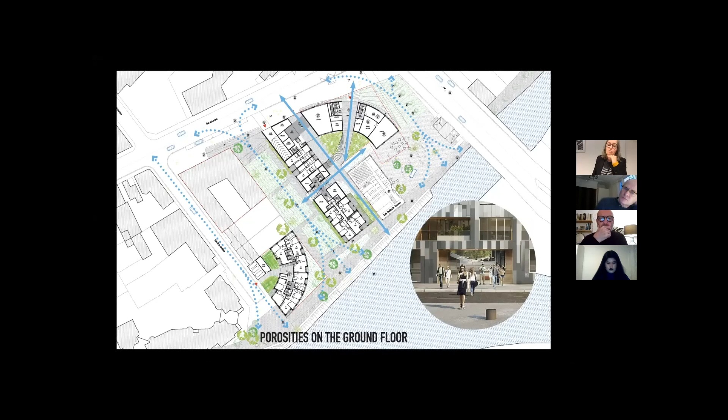You see here some of the floor plans as well. Again, everybody will get their fair share of balcony, different income groups and types, trying to avoid north-facing apartments, which is not always easy in inner city prefixed conditions.

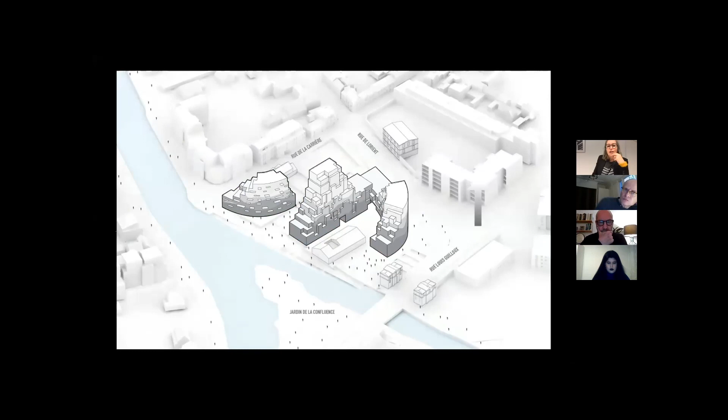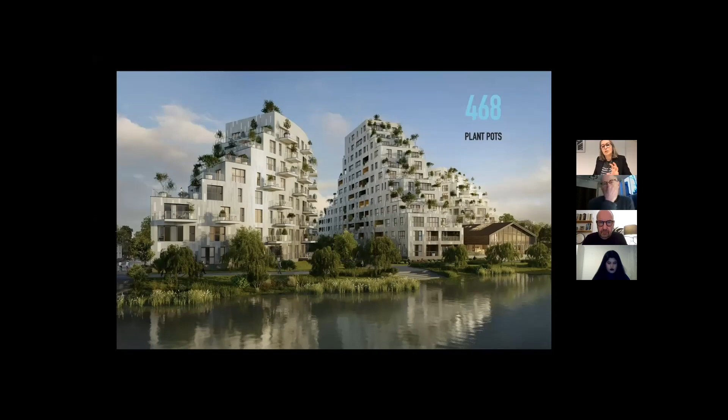The different categories of finance inside. And we played a bit with this sort of carving out and landscaping here by adding a gradient of different ceramic tiles, going up and upwards, becoming much lighter towards the top.

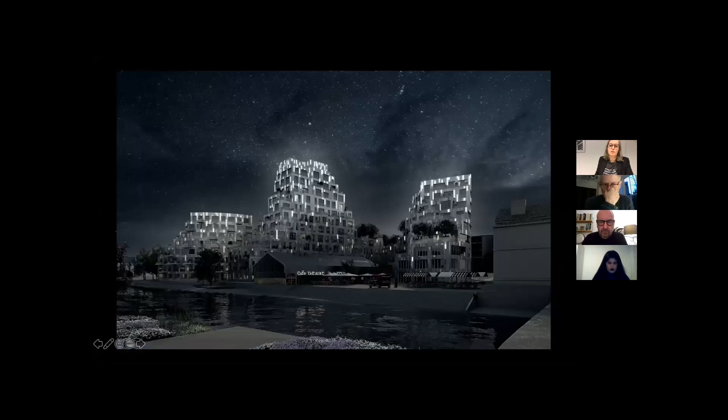You see here one of these openings, not very clear in this image, and how that works to get people through to the water, and the connection with this new little square that we can form, and another opening through the block in the evening. We even have some light tiles that we have added, because it's also a place with a cafe where people will go at night, needing a nice atmosphere.

And this was in autumn, it has actually gone much farther. I'm very happy to show this - this is a bit of the evolution we are making in our thinking, and what we try to apply: less rigorous floor plans towards the end. It's getting more and more important to see if we can draw these smaller floor plans in such a way that they can be connected at some point again, when people want to have two houses or connect to each other - something particular we could introduce as architects to make sure that you can always connect houses again.

Maybe it's an evolution, maybe it's just a development, I don't know. Maybe you can tell me what you think of it. But it's always in this game, like I said: car, garden, house, green, outdoor space, window size. And optimize the floor plans, of course, as much as possible.